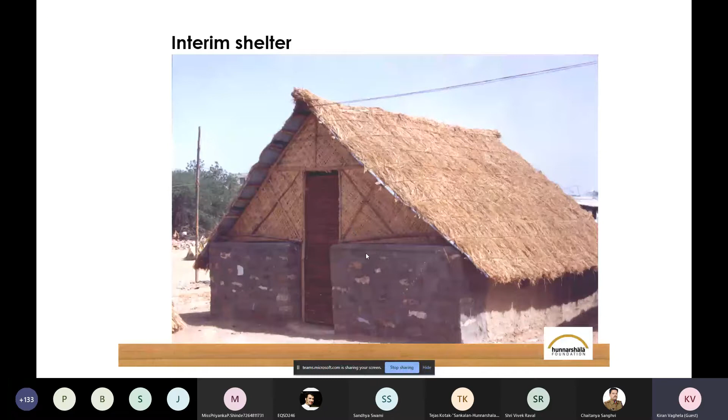The interim shelter program worked like this: we provided 3 bags of cement to build this 1.25 meter wall from the debris. We supported them with 24 bamboos and 550 Mangalore pattern tiles, and asked that they build their own house.

Everybody agreed, because the community felt this was a very positive activity that had started, and they felt they were now rebuilding their life - that was the mindset at the time. This implementation happened through the village committee.

As an NGO, we identified villages that were most damaged, and the central office performed the role of coordinating materials, because sourcing 550 tiles multiplied by 22,000 houses to be built came to lakhs and lakhs, and procurement was a very big challenge at the time. But somehow, with everybody's help, we were able to do it, and the monitoring was also the central office's responsibility.

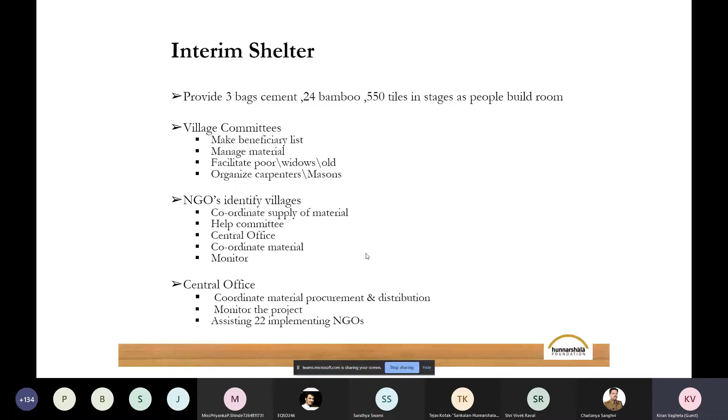The rest of the work is done by the community, and some of the interim shelters looked like that. Some of the structures are still in use. This one on the bottom right, in Sumrasar, is still in use, and many people have modified this interim shelter to make it part of a permanent structure. Many people have recycled the Mangalore pattern tile roof and under-roof structure in their rebuilding.

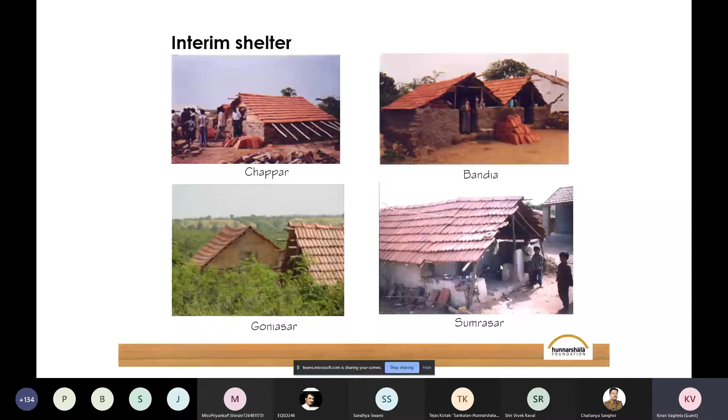Some facts about the interim shelter: this program catered to a total of 240 villages, and a total of 22,000 houses were built. In a total time of 6 months, we were able to build 22,000 houses. This was actually built by people, and from the organization we mobilized 7 crore rupees, but if we consider all people's contribution, it was 13 crores.

So in this interim shelter phase, we became very confident that if you support the community and let the community build themselves, it will make a lot of difference. It will speed up the construction, and you can transfer seismic safety features into a permanent shelter. All such planning happened during the interim shelter.

So after the interim shelter, we started planning the permanent shelter phase. The challenges we identified during planning were that the design should be culturally appropriate, because Kutch is the largest district in India and is jammed with many cultures.

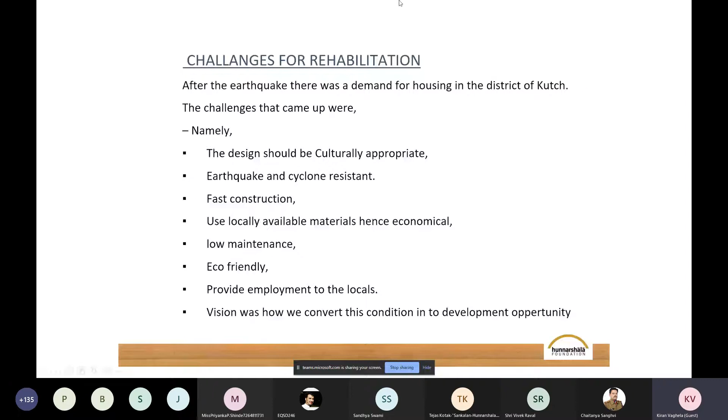So the guiding principle we set for the permanent shelter was upgradation of local skill - whatever local skill needed to be upgraded. Many traditional skills had deteriorated over time. Many new materials were mixed with technical lesser detail or no detail, and that needed to be upgraded. That was what we felt, and upgradation of local skill was one parameter; use of local material was the other.

If we use local material, then the village itself is capable of supplying that material - in terms of sand, sandstone, random rubble stone, soil, and salvaged material under structure. If we use all this material to make a permanent shelter, then the economy will recycle within the village, and that will help them a lot in their normal life.

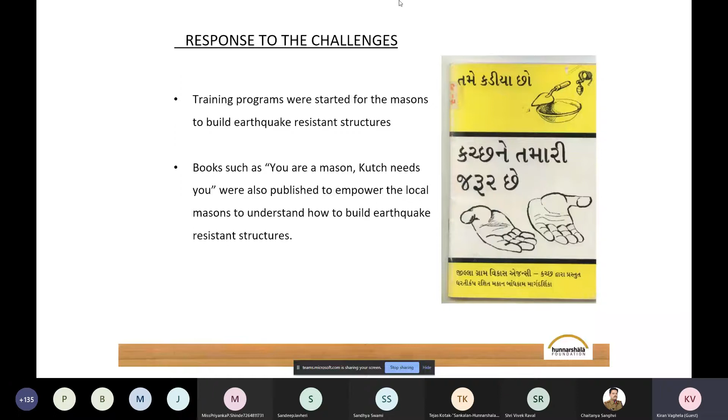In the village scenario, all structures are very simple. They made one room or two room houses according to their economic condition, culture and occupation. Because Kutch is a thinly populated area, we have a large land. In the villages, very few houses are ground plus one, but most of them are only a ground structure.

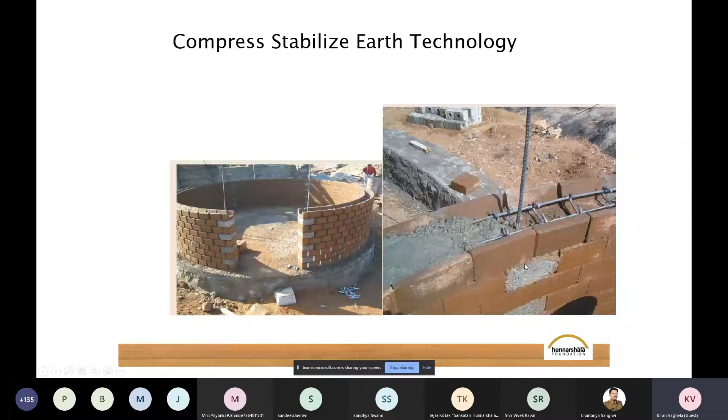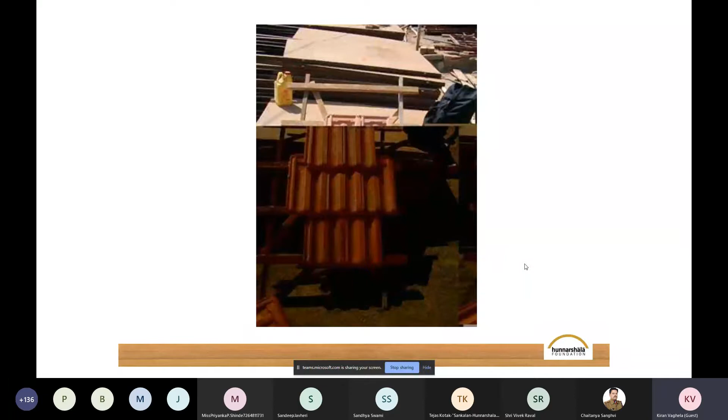Another important feature for the rebuilding was a cyclone-safe house, cyclone-safe roof. Most of the community were using the Mangalore pattern tile. Country tile became out of fashion in 2001, and most of the community preferred the Mangalore pattern tile. But if the Mangalore pattern tile is not tied to the purlins, it's easily blown away by the cyclone. So we developed a cyclone safe hook, which can be made by themselves. We also made one small device for which no expertise is required, and this hook attaches the tile to the roof.

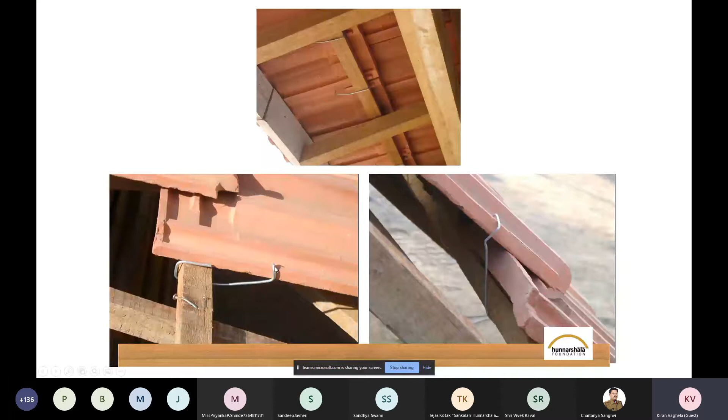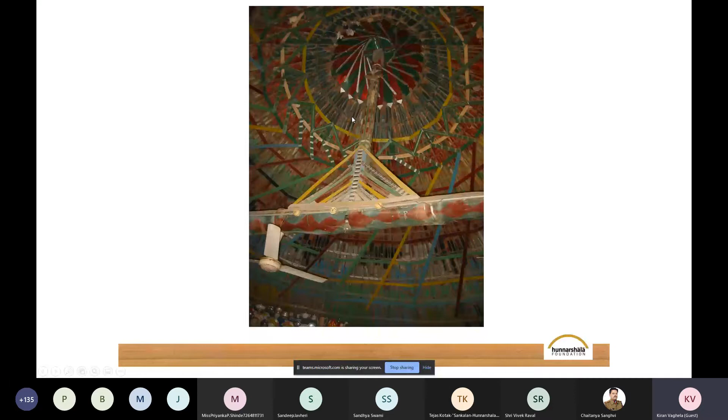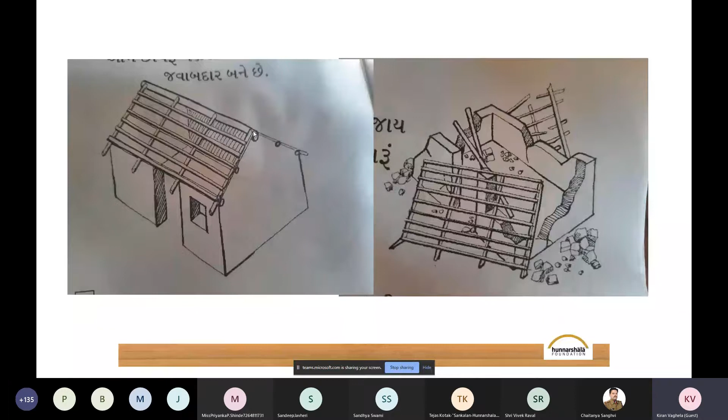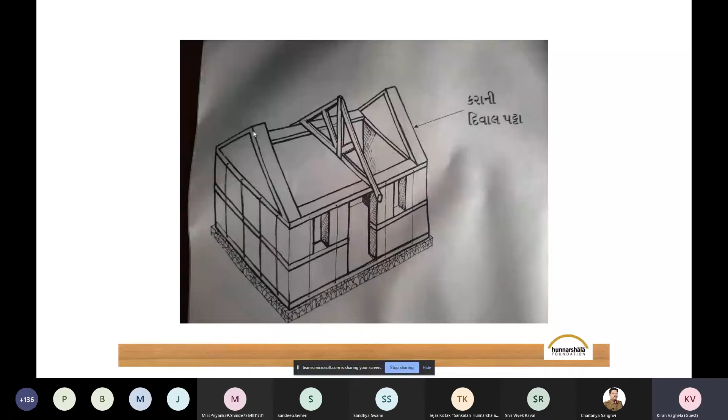So what we have introduced, instead of that traditional roofing system, either a basic king post or a queen post or an A-frame, which is very well tied to the band, lintel band or a roof band, which creates a diaphragm, and all the roof will hold if we tie it together with the wall. Then the entire house works as a box, and it becomes very strong. Not only in earthquake, but it's also a requirement for the cyclone.

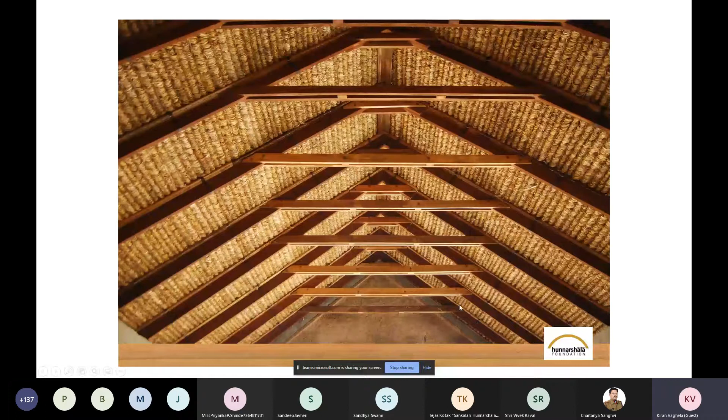So in some of the permanent shelters that emerged, many different communities have opted for different typologies, and these are some of the pictures of different parts of Kutch. Some of the communities also have tried a very new material, a ferro cement channel, because their aspiration was having a flat roof, but casting RCC was not possible because that kind of infrastructure was not there. Then some organization transferred how to make ferro cement channels.

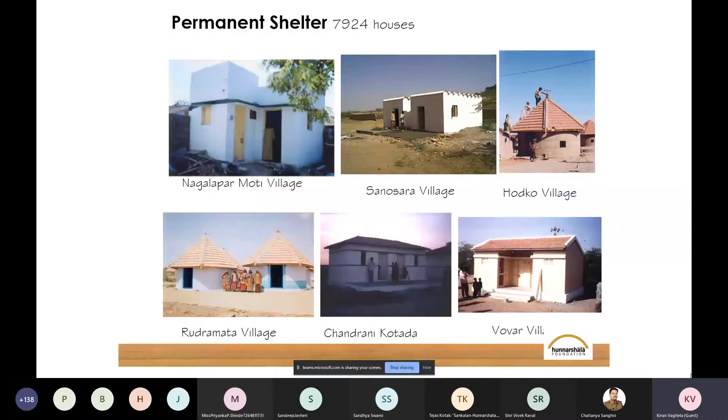This structure is the traditional structure built with stabilized earth. Tejas sir will talk more about that. Due to fund restrictions, many communities have not covered the veranda, but they have planned it while building their permanent shelter, so that the veranda may come in the future as an extension. So there were lots of possibilities that emerged. Even rural urban communities have opted for alternative technologies like stabilized earth technology. I think Tejas sir will talk more about that. I'll leave it.

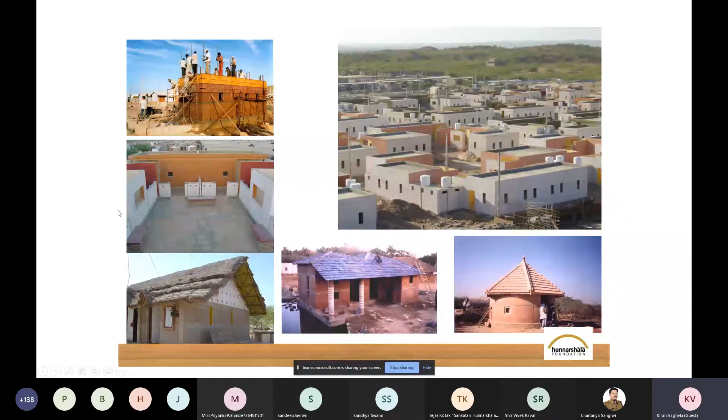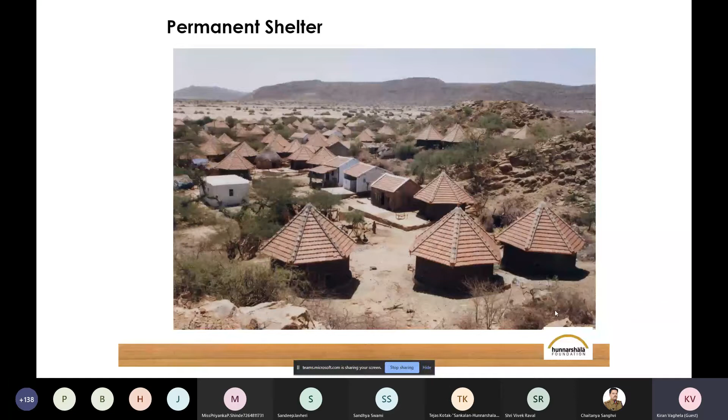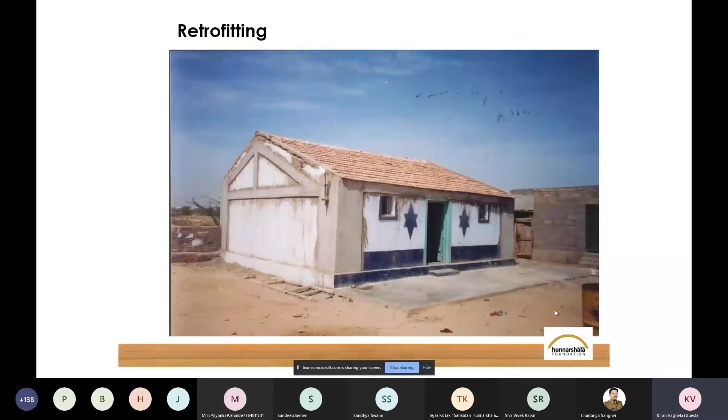And in the northern part of Kutch, the rehabilitated village was looking like that, and people are proud to be in a new house. That gives us total satisfaction. Retrofitting was also carried out, and many training programs were conducted. In structures where there was no lintel band or corner bars, how to attach weld mesh to an existing structure and retrofit it to make it earthquake resistant was also part of the program.

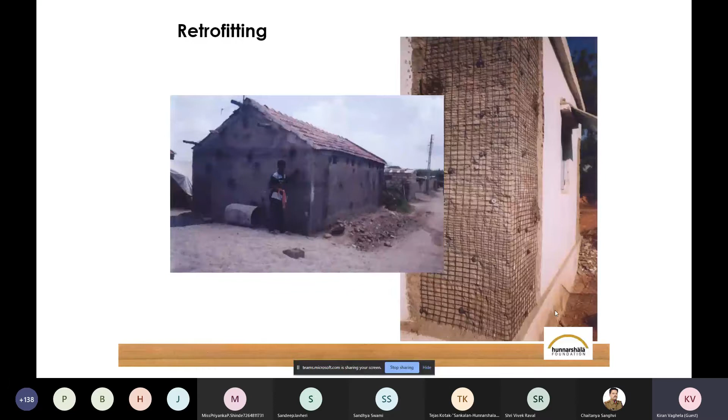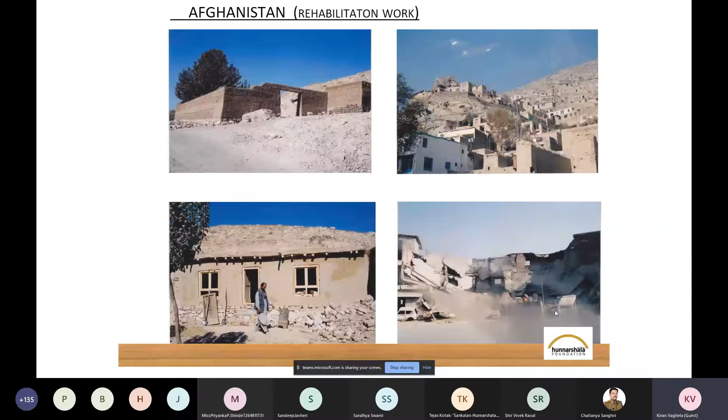After this earthquake, Afghanistan also had an earthquake, and Professor Arya invited us to share our experience, because the Afghanistan government invited us to write a guideline. In Afghanistan, 90% of the structures were built using unstabilized earth, so what should be the guideline to make this sector earthquake resistant? We participated in that with Professor Arya. Thereafter, an earthquake happened in Bam, Iran. We also participated, understanding the local skill and local material, and built a demonstration house in the Bunyad-e Maskan office campus. Bunyad-e Maskan is equivalent to the PWD in India.

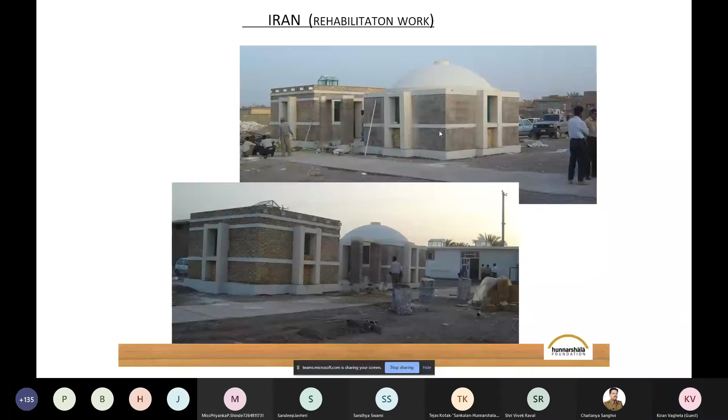So we designed with the community how to make an interim shelter with salvaged wood. In Tangdhar and Uri Valley, 27,000 houses were built in just a 3-month period, and that was really an experience working with the community and bringing out the community spirit. We also participated in the Bihar Kosi rehabilitation work.

No, it doesn't come. It shows me only this screen, the Microsoft Teams screen. So click on that screen. Just a minute. Is it showing? Can you see? Yes, sir. It is very visible. Very good. Thank you so much. It seems I'm technology constrained. No, sir. I thought I was pretty good with technology, but the reality is not that.

Okay, let me begin with my presentation quickly. So I'm discussing rural housing and earthquake safety, with some examples of our experience of post-earthquake reconstruction in Nepal. Before I get on to discussing Nepal, let me talk a little bit about rural housing. When we say rural housing, it is very important to understand the difference between housing and houses. And we want to discuss housing.

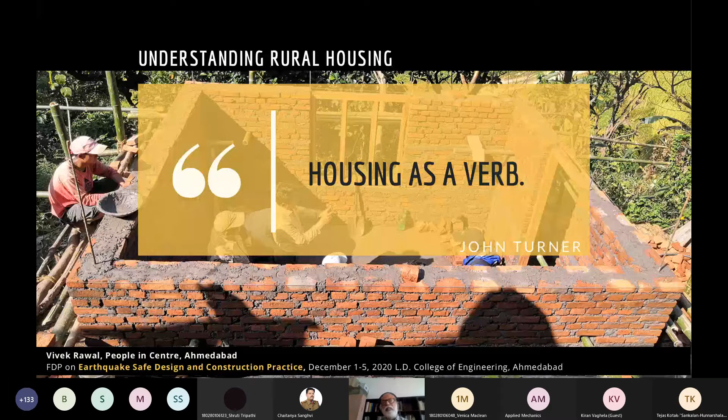And it's a very interesting quote, which forms the basis of all our perspectives with which we have been working for more than 25-30 years, that housing should be seen as a verb. Housing is a verb. Kriya hai. It is not a noun. So the moment you see housing as a verb, you start understanding how rural people, rural communities see their houses. How do they think of their houses?

So the key elements of the rural housing process is that people need access to land. There is a process involved. How do people get to own land, how do they get to use land? There can be various different forms of ownership and tenure which give them access to land, which is an extremely important aspect when we want to discuss safe housing, because a lot of vulnerability for housing is related to land, where the house is located, where people are building.

Similarly, the second aspect for housing process is access to finance. People need to access finance, which is dependent on what they earn, what they save. There are various different ways through which people borrow. There has to be an easy access to finance if we want to build house.

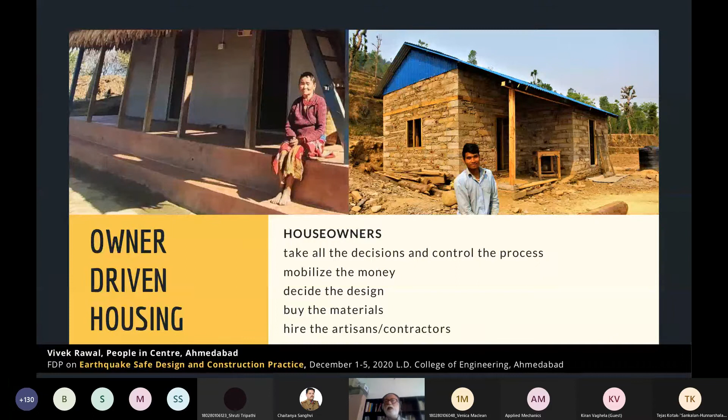They are the key drivers. In urban areas, the processes have become slightly different, particularly in big urban areas like say Ahmedabad, Jaipur, Delhi, Bombay, where most of the people are just buying their houses. It's like a consumer good, where you have your budget, you have 4 or 5 options which the builder is giving you, you just choose and buy. But rural housing is quite different, where the owner is still in control. They take decisions.

Another important part of rural housing, very important to be understood if we are talking of earthquake safety, is that most of the rural housing is incremental in nature. The house grows as the family grows, as family can afford more. The initial construction may be small, a small unit, but then people add. A room is added in the front, then another room may be added after a few years. When the child is born, one room gets added. When the child gets married, another room may get added, and so on.

And if there is more earning, more income, people add to the house. So the whole house may not be built in one go. The house is built slowly over a period of time, and that can become challenging when we discuss earthquake safety.

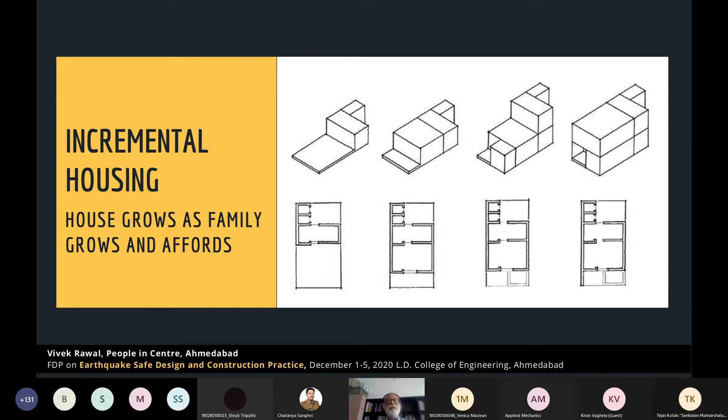Let me discuss Nepal a little bit with this background, with these aspects of rural housing in mind. The reason we are discussing Nepal is because it is one of the most recent examples. This is my most recent involvement also, and quite an extensive one. I have been involved in Nepal for the last 5 years, starting from May 2015.

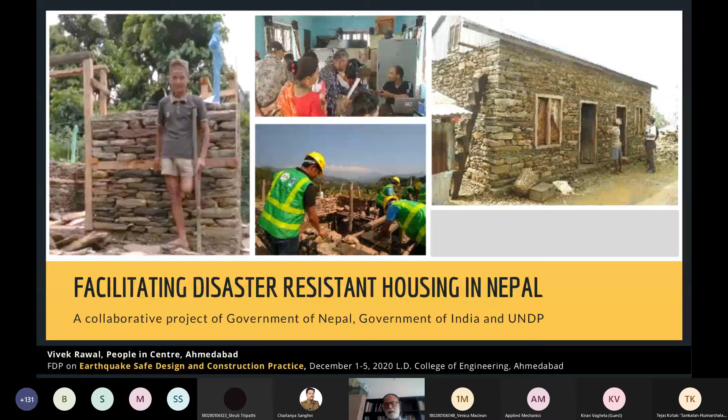On April 25th, there was a big earthquake with the epicenter in Gorkha district. And then there was another major earthquake on 12th May with the epicenter in Sindhupalchok district. These are two districts in Nepal. Nepal has many districts, but 31 were earthquake affected districts, of which 14 were very severely affected. Maybe a little bit of detail will come later about the Nepal earthquake.

But to support this whole rural housing construction program, there were various interventions taken up. As I discussed earlier, when we are talking of rural housing, we are essentially talking of an owner-driven housing program where owners build the house. We are only playing a supportive role. So the nature of our support has been like this: people needed help in navigating through administrative procedures, because the government of Nepal was going to finance, and there were procedures involved in accessing that financial grant.

People needed help on site where they were constructing. There were technical consultations required. People who were in urban areas had to take permission from the municipalities and had to get their designs approved. They did technical design services for building permit.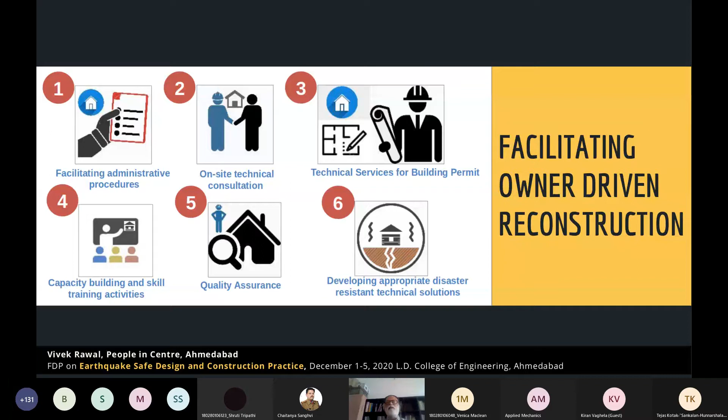So this was the nature of support in the Nepal program. Briefly about Nepal, about 4.5 lakh houses had collapsed, and nearly 9,000 people had died in this earthquake. 14 districts were very, very badly affected. There was a large exercise in 2015 taken up with support of UNDP, World Bank, and the government of Nepal to estimate the cost of reconstruction and recovery. Only for housing, nearly $2.3 billion was the need estimated. Overall need was about $6.2 billion.

I was actually part of the housing sector team to make this assessment of resources required for reconstruction. Based on our report, the government of Nepal undertook an international conference to mobilize resources, because it was a huge scale of money required for reconstruction and recovery, about $6.2 billion, as I mentioned earlier. If you see, housing was nearly half of it. Nearly 40% of the resources were required for housing only. Compared to other sectors like agriculture, livelihood, industries, health, education, all those together, housing was the biggest component.

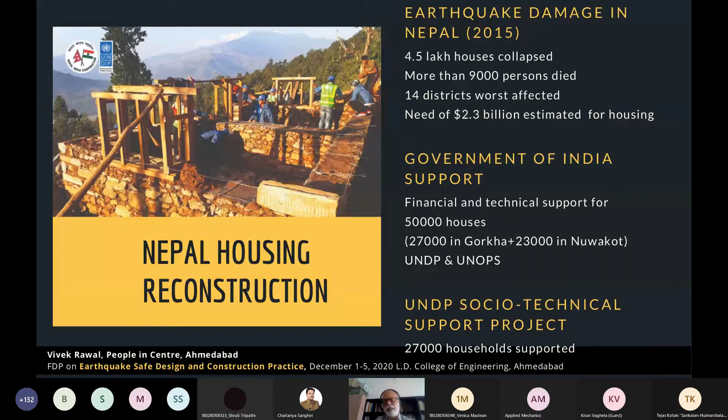So the policy making was not as smooth as we had seen it in India, where the governance systems are far more established. The national government was a new government, new prime minister, and a new reconstruction authority was formed. They did not have a disaster management act, so they had to come up with a new act. So with all these complex processes, it took almost 2 years for Nepal to initiate the reconstruction program.

They decided that every house owner will get about 3 lakh rupees support, that is about $3,000, in 3 stages of construction. So Government of India followed Government of Nepal's policy norms and provided $3,000 to each household as assistance. The house cost is almost double of this. So you can say that almost $3,000 was people's own contribution in each house. This program was undertaken in 6 villages and 2 nagarpalikas.

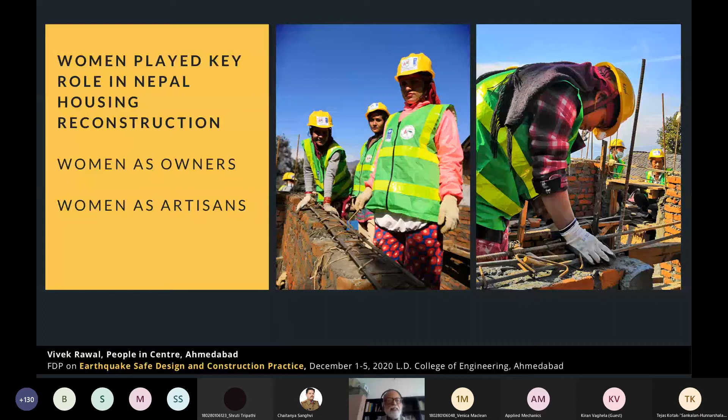Another important aspect of Nepal reconstruction program has been to work with traditional construction practices. Nepal being a very difficult geography, many villages are very remotely located. Road network infrastructure is not very good. Not every village has electricity.

Most of the construction season is essentially from December to April or May, basically the winters, because summers and monsoons are when the agriculture work takes place and people are busy with agriculture, which is essential for their survival. So construction happens in the winters when agriculture cannot take place, and that is also the time when water is less because it freezes.

So technologies which require a lot of water are very difficult to use. Access is also a problem, so carrying material like cement and steel from Kathmandu Valley to these villages is not easy. Realizing all these constraints, the government of Nepal was very pragmatic and quite positive about continuing and strengthening traditional building practices.

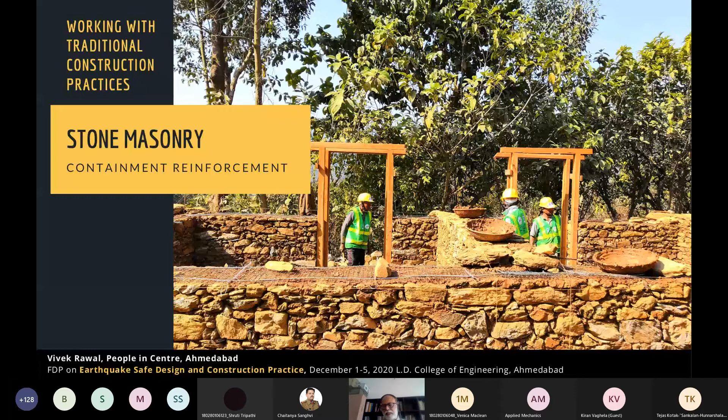More rigorous analysis was taken up, and this whole technology was then presented to the Ministry of Urban Development, which looks after the building code process in Nepal. So there is a Department of Urban Development and Building Construction, DUDBC, which approved these technologies after a lot of consultation and review of technical results.

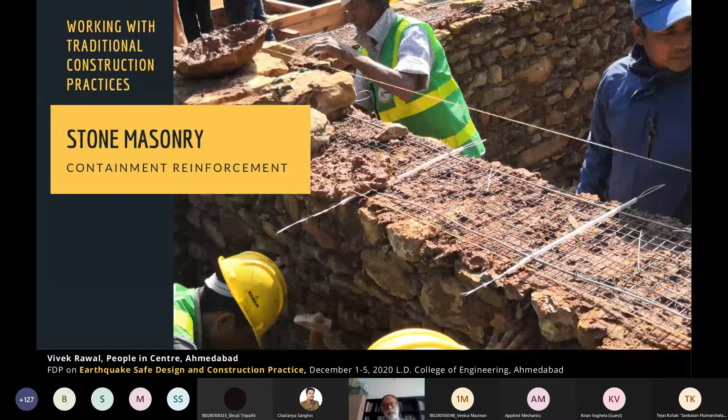So using weld wire mesh in horizontal bands every 1.5 feet of construction, and then tying on both faces with vertical GI wires to contain the masonry - that kind of construction was taken up in these different villages. More than 2,500 masons were strengthened through various workshops and training programs and on-site construction work.

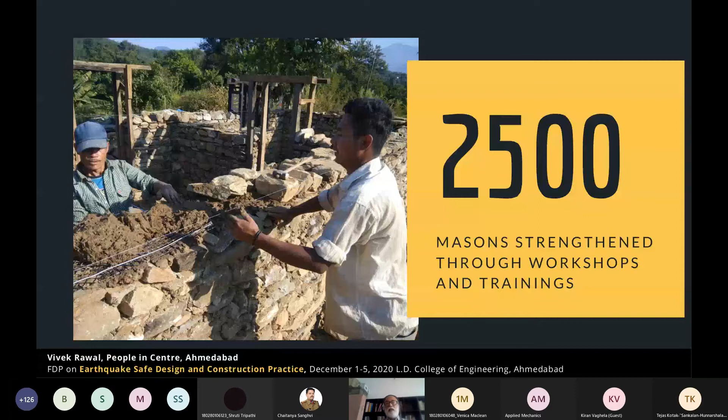Just want to show you some photographs to convey this. Now, these are the traditional houses that Nepali artisans have built on their own, and just look at how beautiful these houses in Nepal are - you will find similar houses in Uttarakhand, in Himachal, or Jammu Kashmir.

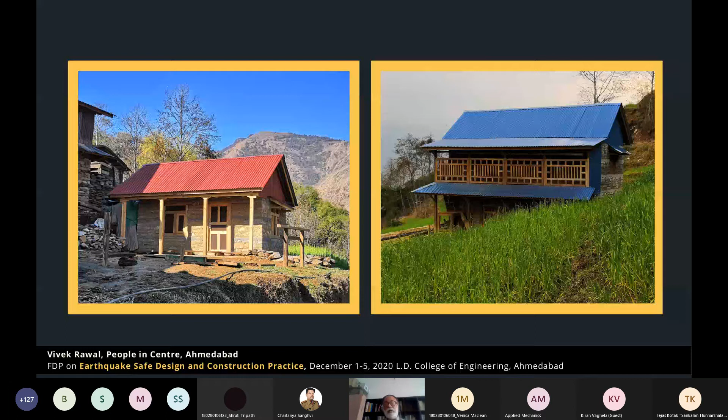If you see the kind of houses which modern day engineers have promoted and supported, then you find these kind of houses. Both these are examples from Nepal, not in our project area, but many such houses are now being built after the earthquake. But you can see the kind of houses they had earlier, which are built by local artisans without any help from engineers.

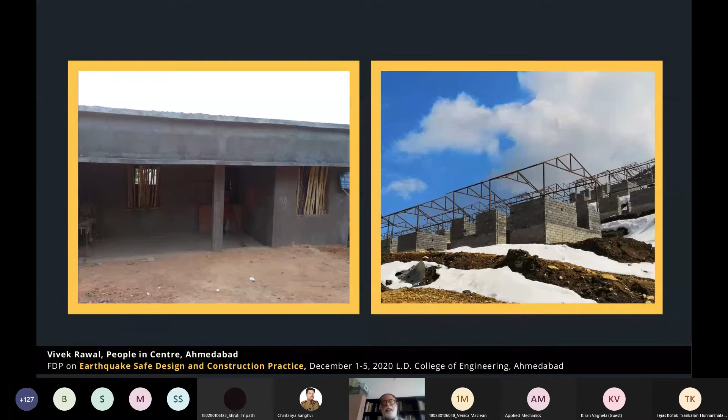Most of the time we end up building some of the most ugly and unsustainable, climatically most inappropriate buildings. What is important is that we work with local artisans and local communities, and it is possible to take the traditional technologies forward and make disaster resistant houses. So this is one example.

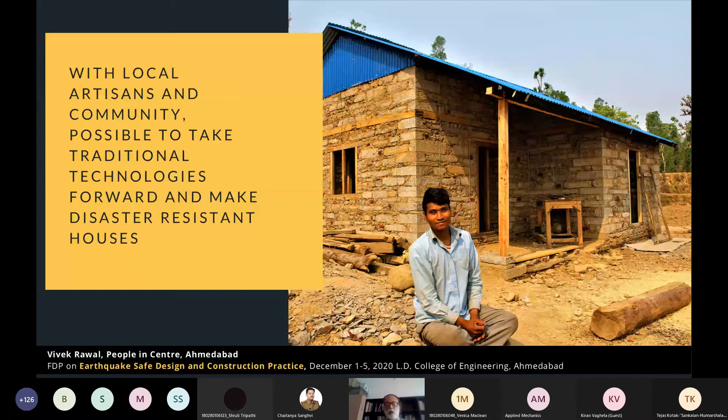But that's the beauty - it retains the aesthetics of traditional houses. So with very simple interventions, if one interacts with local artisans, solutions are possible within their own materials and skills.

Now, this is my concluding slide, just four points finally. Number one, empower the local communities, and it is important that we interact with them as they are resourceful, they are knowledgeable, they are experienced. There is no reason for us to assume that a rural house owner or rural household or rural family doesn't know anything - that we know everything and need to go and tell them.

No, we need to ensure that they don't lose their control - they continue to be empowered. Secondly, we need to empower local artisans. Again, local artisans are the resource person and service provider for local communities.

It is they who enjoy the trust of the local community, not us. Local artisans advise and guide, and people listen to them. We go and guide, but we do not understand their constraints in life, their livelihood, how they live, their lifestyle - we don't understand. Local artisans understand all that, and they can communicate in a language or phrases which people understand. So we must empower local artisans if we want houses to be safe.

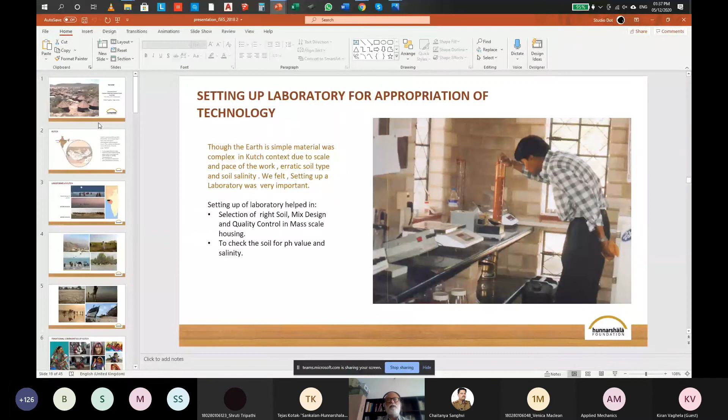So these have been our learnings in our project. That is what I put before you for your consideration. If there are questions or a discussion, I'll be happy to share my experiences and learning more on whatever is required. Thank you very much, and thank you Professor Sanghvi for organizing this and providing this opportunity. Thank you very much.

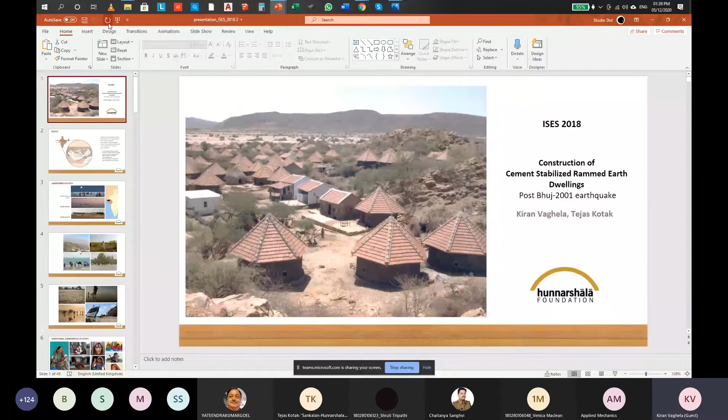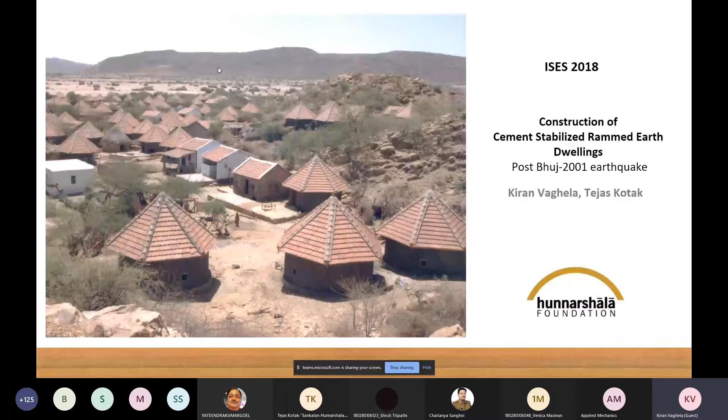Construction of cement stabilized rammed earth dwelling houses. I'm coming directly to our experience in the Kutch earthquake of 2001. Kiran sir has broadly explained about Kutch, so I'm not going in depth, but some slides show the variety and landscape of Kutch, the Great Rann of Kutch, and the many different communities and cultures Kutch has.

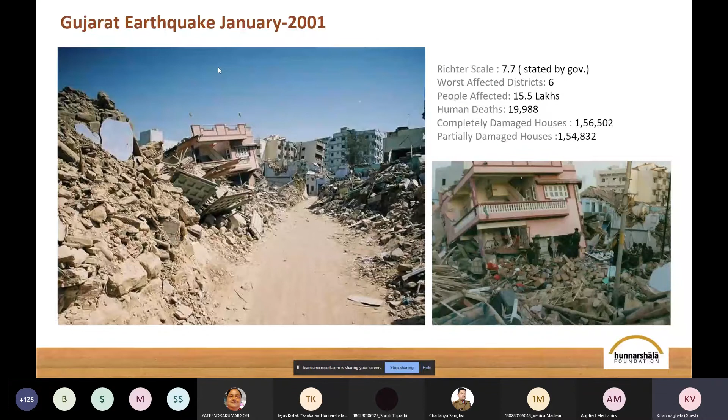Kiran sir has already explained all these things, so I'm not going deep into the Kutch earthquake part. I'm coming directly to construction with earth - what we experienced and how we built more than 2,000 houses in Kutch. If we see the pre-earthquake roof structure, the community calls it a 'bhunga' structure - a circular structure with a thatched roof. Normally it has three parts: roof, wall and floor. Traditionally, thatch is used for roofing, the wall is adobe, unstabilized cob or wattle-and-daub, and the floor is mud. So they wanted to change this after the earthquake rehabilitation program.

They don't want to maintain the structure in a routine, but they want earth as the main material in construction, and they want the same type of structure—circular structures with a hip roof. So this is how we arrived at the design: we change the thatch to Mangalore tile with a wooden structure, and adobe unstabilized to stabilized construction. Cement stabilized means compressed stabilized earth brick, or stabilized rammed earth, used as the walling system, and the floor is a solid cement floor.

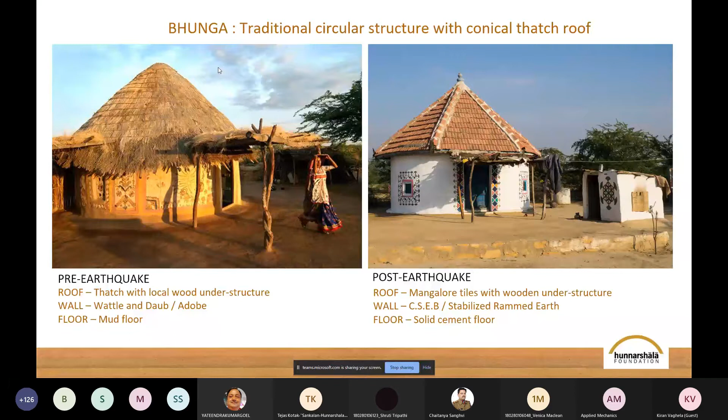If we go to the housing typology, how they built in a big platform like a circular structure, as Vivek sir explained—normally they do extension time by time. So they build one structure, then another structure, and connect them. This is how they built traditionally, and section-wise you can see the section.

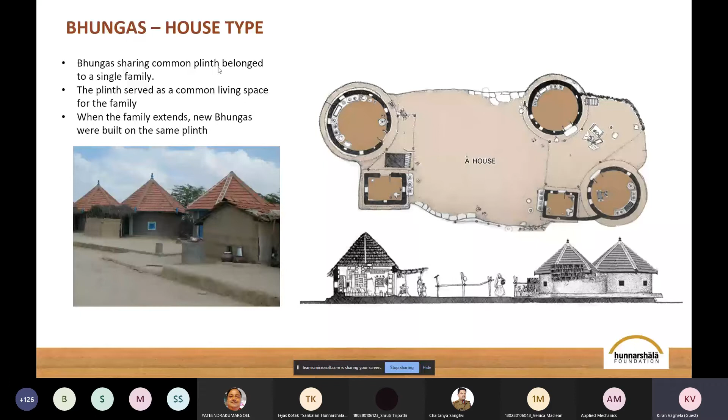So if we consider this kind of construction in their typology with a little bit of difference, like a stabilized earth construction, that is our experience in how we can transfer the technique.

So Hunnarshala had set up a Matti unit, an earth unit, mentored by IISc and Dr. Yogananda. They transferred the technique based on their more than 30 years of experience at that time, and we started the training program—the Matti unit received the training program from IISc and CSR.

It's based in Auroville. Follow-up training was conducted, and the Matti unit devised a training program for professionals, rural experts, and artisans.

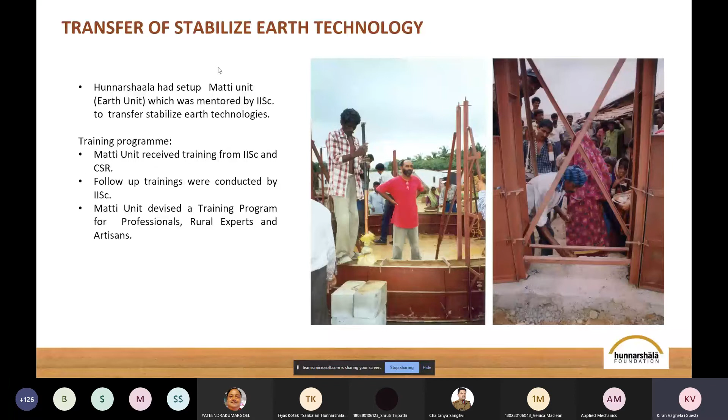So transferring this technology to the local community, the Matti unit offered a training program for the artisan community. There are three different parts: hands-on training program, on-site training program, and follow-up training program. To initiate the training program, demonstration houses were constructed in every village, involving a team of local artisans.

Then we set up a laboratory for appropriation of technology, because in the Kutch region the soil is a little bit different compared to the southern part of India where they had set up before. We have salinity which causes erosion in the structure—saline water and a different kind of soil, very sandy and silty. So setting up a laboratory helped in selecting the right kind of soil, mix design, and quality control at mass scale.

To check the soil pH and salinity, we derived a certain kind of system to get confidence in the practice.

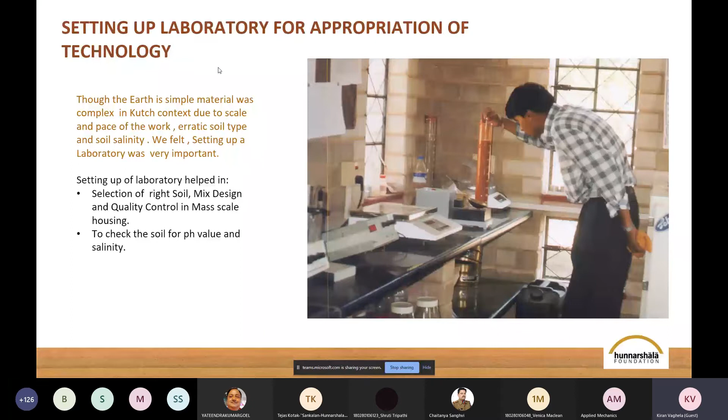Density is a main part when we are stabilizing the earth. We connect the density to get the proper compressive strength, and it's a quality control measure. This graph shows how it relates directly to the strength of the structure.

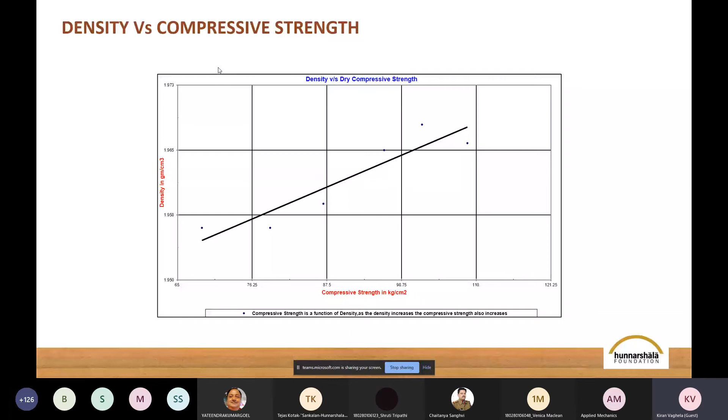All this was happening, and as Vivek sir and Kiran sir have said, Dr. Yogananda and Professor K.S. Jagdish were helping at that time, and Dr. Arya, Professor Arya sir, who had passing authority and was part of GSDMA, endorsed this technique.

As a result, 56 villages adopted this technology in Kutch, which was approximately 25% of the total rehabilitation program, and a guideline for the construction of stabilized earth wall buildings was established and published by the government.

In terms of design features, the inner diameter is around 4.5 meters and wall height is 2.1 meters, with wall thickness of 23 centimeters. It's a hexagonal conical roof with a wooden structure, wall height around 2.5 meters, and roof height from lintel to crown around 2.1 meters.

The scale and design were developed with the local community, but the technique is all earthquake safe, to make the structure earthquake safe.

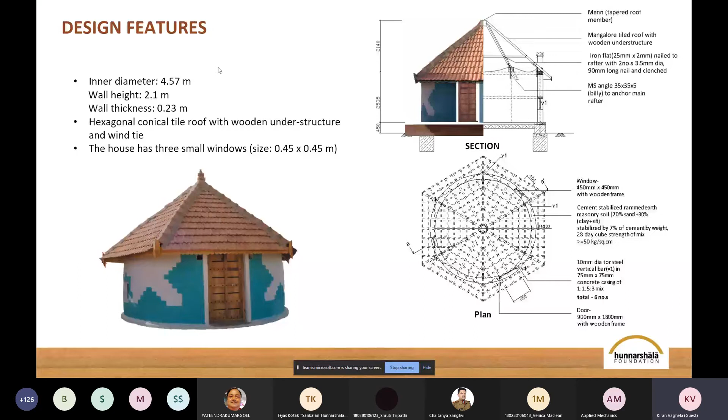So earthquake resistant features for the Bhunga were developed—achieving earthquake safety was the most critical part. It's a load bearing construction that completely follows the earthquake resistant code IS code 4326 of 1993. As per the code, sill, lintel, and roof bands are required, along with corner vertical bars. So we incorporated 6 vertical bars dividing the around 50-foot periphery of the structure, along with all bands as per the code.

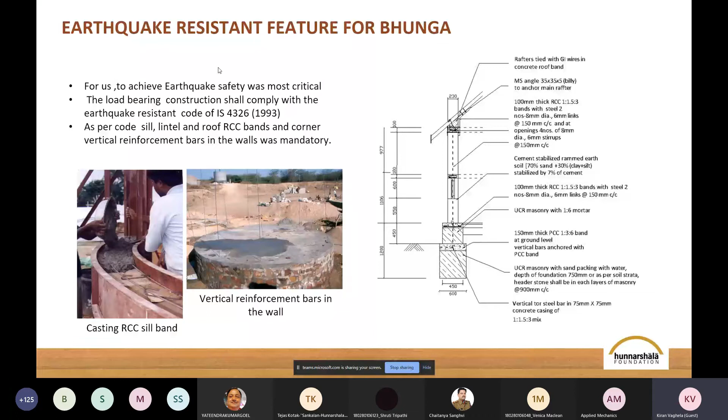Now, if you go into the technique a little bit deeper, the formwork which we have developed, because we wanted to construct 2000 houses very fast in a certain period. So simple construction processes: it has to be user friendly, speedy construction, easy to install and dismantle the formwork, strong enough, and the formwork should be of multiple use, flexible enough for the openings and closings, and formwork with a fair finished surface, because we don't want to plaster, and whatever the structure, no plaster is applied.

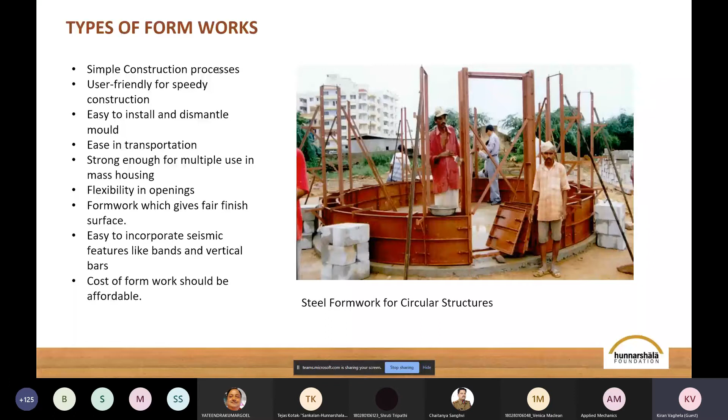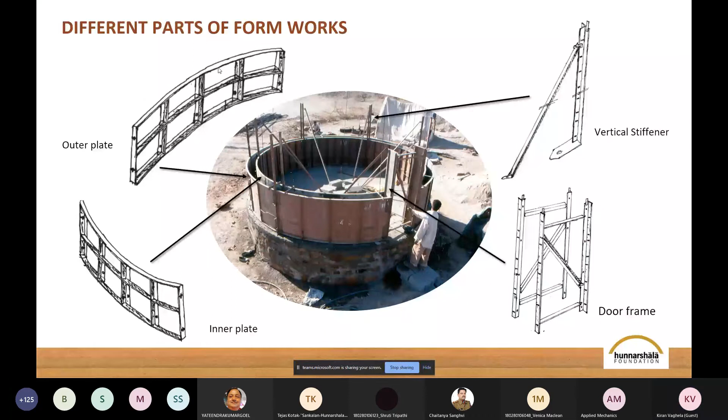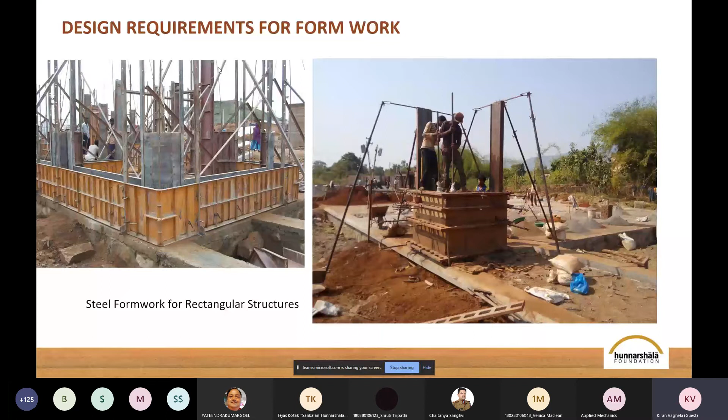So all these things we incorporated in the formwork, like this is the formwork in a house. So all the different components that we have designed. I'm not going deep into the different parts as we don't have much time, but it's a formwork system. Then the city and people wanted rectangular houses, so we also developed the metal and wood rectangular structure formwork, and these are all the different formworks we have designed.

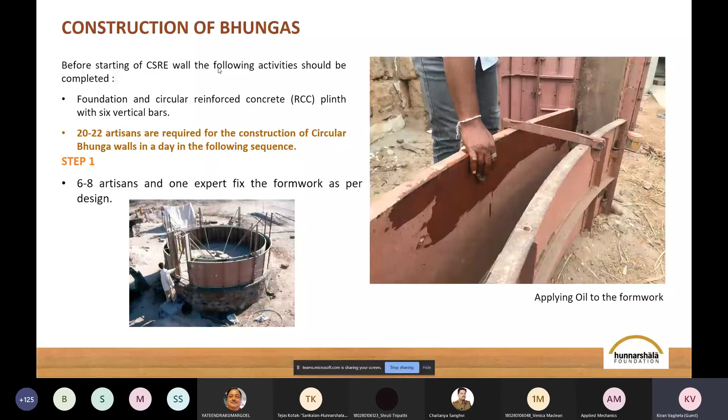So the construction process is around 22 artisans in one day. They complete the full structure. This is what we have achieved, circular structure in the rehabilitation program. If we divide it step by step, 6 to 8 artisans erect the formwork. Then the second step is the local community. They sieve the soil and they help the artisans with the mixing.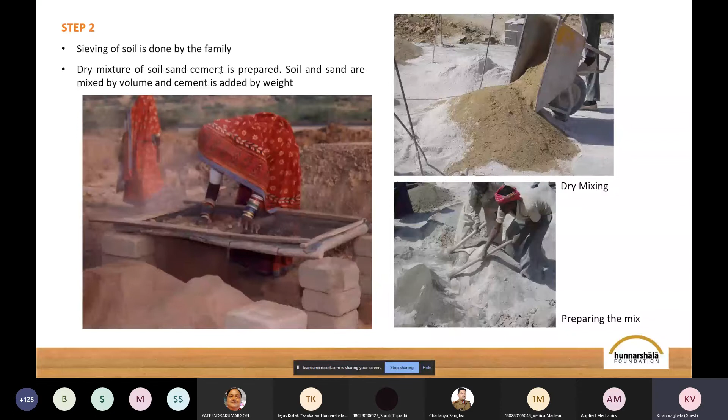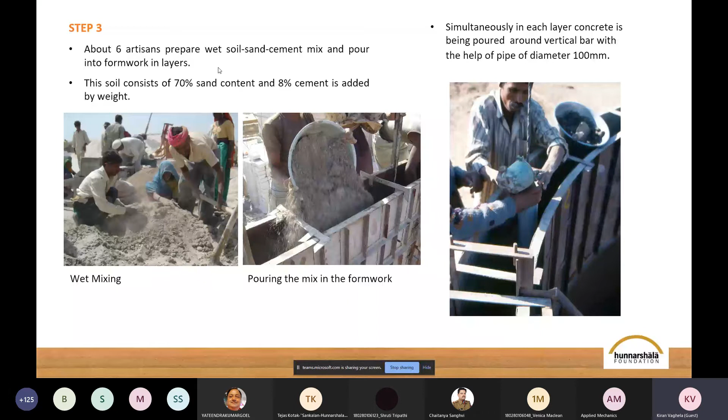About 6 artisans prepare the wet soil-sand mix and pour it into the formwork. This soil consists of around 70% sand content and 8% cement, added by weight. Simultaneously, for each layer, concrete is being poured in the vertical bar locations. So 8 artisans immediately start the process of ramming the soil mix manually using the rammer.

The loosely filled layer is around 120 mm before ramming and around 80 mm after ramming. We use two types of rammer: over the whole part, around 150 by 150 mm square rammer, and where the vertical bars are, we have used a smaller size, 75 by 150 mm. They are around 7 to 10 kilo rammers, both different, 7 and 10 kilo.

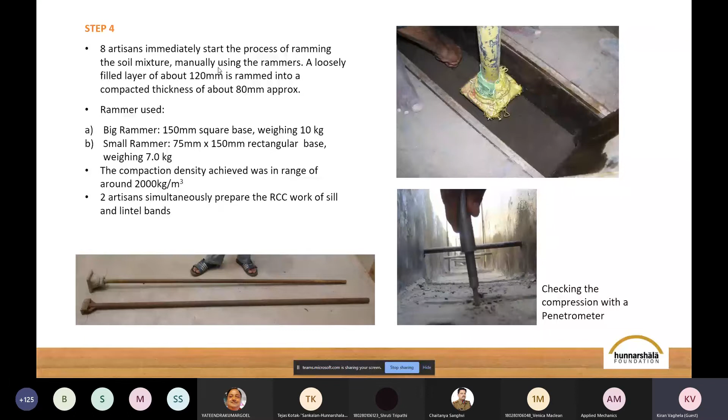Step three: when we reach sill level, we pour the concrete with the bars, and finally in one day we complete one structure. So these are different photographs, and 28 days curing is required as we use 8% cement in the soil.

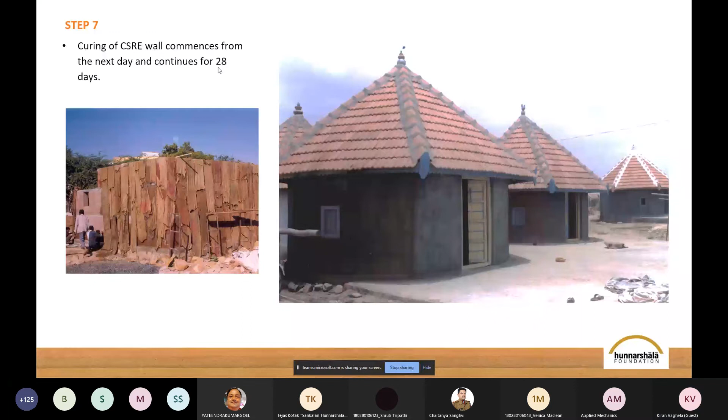We saw the process, but how did communities take it? The community preferred rammed earth because rammed earth is a monolithic structure. They see and check by themselves. In masonry there was a need for skilled masons, and the house owner could not participate in the construction process. In this process they easily participate in the curing, mixing, installation and ramming parts.

So the superstructure for one house was completed in a day, and seismic features were easily incorporated, because in a masonry structure it is a little bit different. Less maintenance, because there is no plaster. There is no need for plastering, and rammed earth technology helps in generating the local economy.

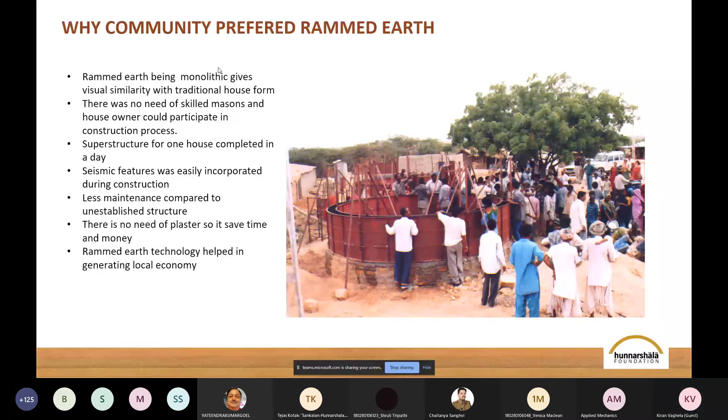So after this experience, we have utilized non-organic solid waste in many projects. The China clay industry in Kutch generated around 30,000 tons of solid waste every month. The solid waste basically contains around 70% sand content, and a little bit of silt and clay. So this kind of inorganic waste we used when we worked on city level construction in Bhuj.

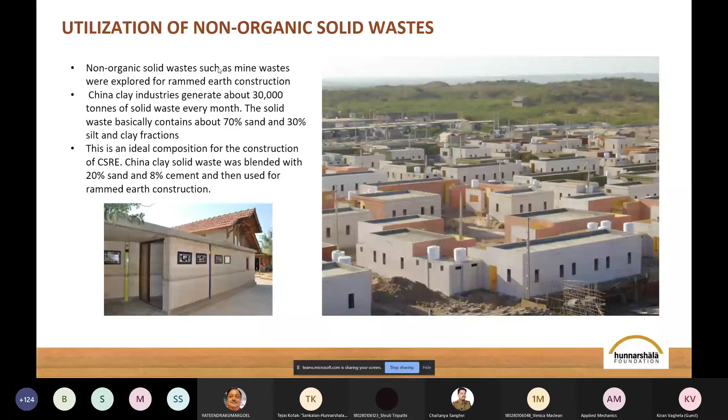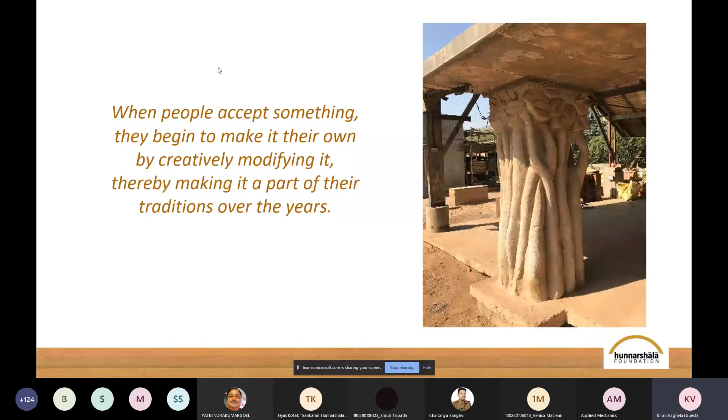So when people accept something, they begin to make it their own by creating, thereby making it a part of their tradition over the years. So this is the journey so far.

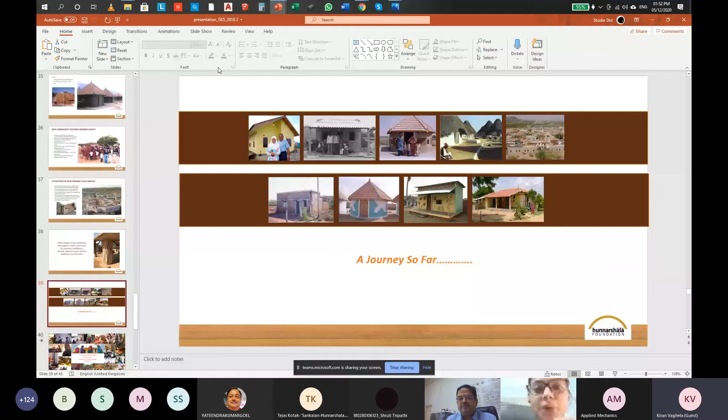Hello. Sir, my question is regarding the cost of construction. Yeah, the cost of construction in Kutch was 128 rupees per square feet at that time. In this cost, the steel and the cement were subsidized by the government. At the time, government policy decided the cement rate would remain 100 rupees a bag, and steel, I'm forgetting the figure, but it was subsidized.

Sir, my second question is regarding the foundation. Sorry, this cost doesn't include plumbing and electrical gadgets. Okay. Sir, what about the foundation? Have you done PCC or some plum concrete?

In the foundation, Kutch has a tradition of random rubble and sand packing foundation, and this was approved by GSDMA, and the substructure has not used any cement; it's layer by layer. They fill the foundation with rubble and sand and pack it by pouring water, and it becomes a very strong foundation. It is very traditional, and no cement is used until the foundation reaches minus 0.15 ground level.